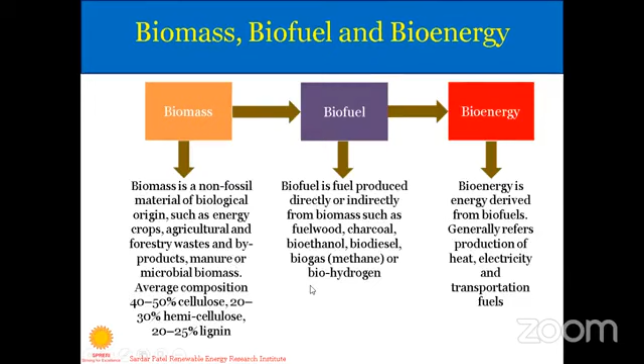What are the benefits of biomass? Biomass has several benefits: it is versatile, it has value for waste, it is abundant, and it has economical impact. According to the survey, around 500 million metric tons per year of biomass is generated in India, which has potential of 18,000 megawatt power generation.

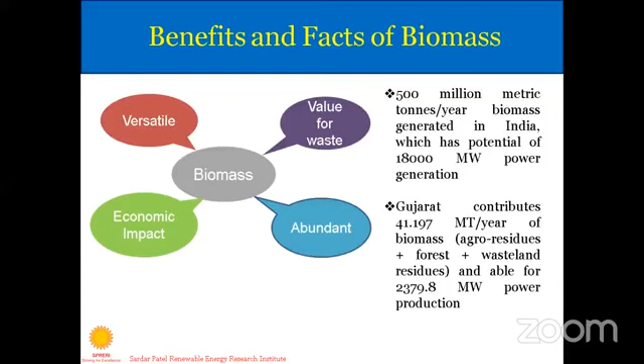If we talk about Gujarat, Gujarat contributes around 41.197 metric ton per year of biomass, which includes agro residues, forest residues, and wasteland residues, able for production of 2,379.8 power production. So there is biomass conversion technology.

There are basically two main types of biomass conversion technology: thermochemical conversion technology and biochemical technology. Bioconversion technology is basically fermentation and anaerobic digestion. I'll be talking about thermochemical conversion technology.

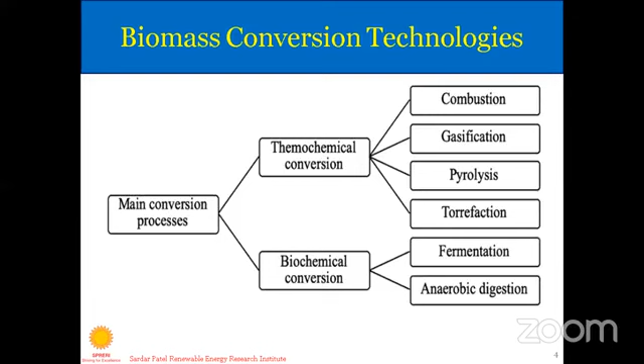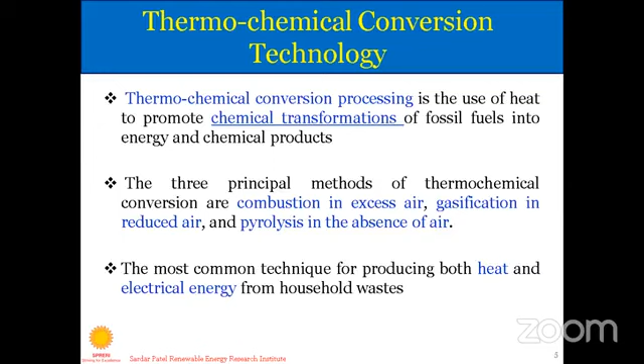What is thermochemical technology? Thermo means heat and chemical means chemical transformation. So by applying heat, we transform the chemical present in fossil fuels or biomass into energy and chemical product. Whenever thermochemical conversion technology exists, it's very simple: it happens in excess of air, reduced form of air, or absence of air. By all three means, the heat energy in the fossil fuel or biomass converts into useful chemical.

Types of thermochemical conversion technology: there are basically four types - combustion, pyrolysis, torrefaction, and gasification. Combustion happens above 500 degrees Celsius, and the primary product of combustion is heat. Pyrolysis happens in the range of 350 to 800 degrees Celsius, and the major products of pyrolysis are char and bio oil.

Torrefaction happens in the temperature range of 200 to 300 degrees Celsius, and the primary product is stabilized biomass, which is rich in carbon. Gasification happens in the temperature range of 700 to 1500 degrees Celsius, and the primary product is syngas or producer gas.

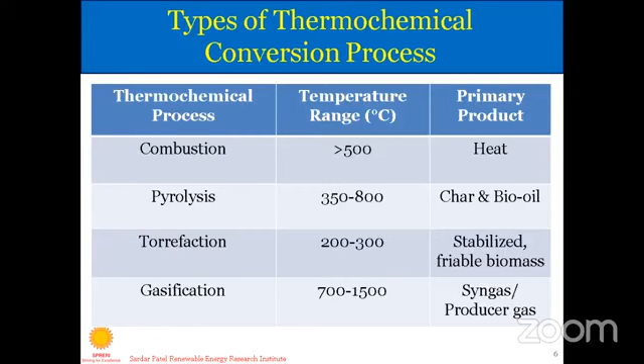Okay, so one by one I'll explain about all the technology. Combustion is a chemical process where any kind of fuel, fossil fuel or biomass, reacts with air to produce heat energy. So here are the types of combustion.

Basically, the main types of combustion are complete and incomplete, but there are subdivisions also. In complete combustion, the major product is CO2, and in incomplete combustion, the major product is carbon monoxide, where a partial oxidation reaction happens giving carbon monoxide. Rapid combustion examples are natural gas, LPG, petrol. Spontaneous combustion comes under phosphorus and sulfur. Explosion examples are firecrackers and bombs.

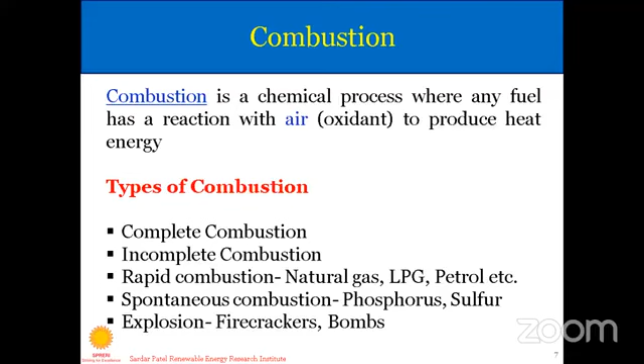Previously I was talking about the technology transfer division. Here, what we do is design and develop reactors. We do R&D on bench scale, batch scale, pilot scale, and then we transfer the technology to the field.

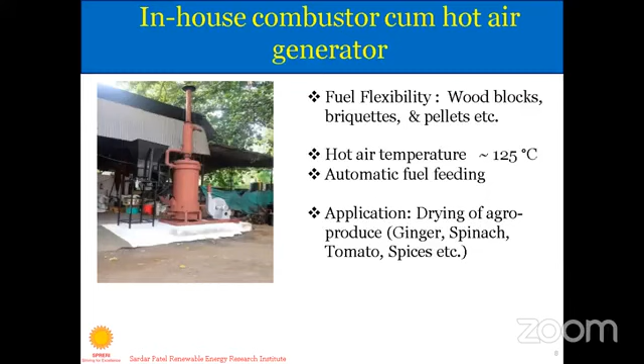So here we have an in-house combustor, which is fuel flexible, meaning we can use any kind of fuel - wood blocks, briquettes, pellets. The hot air temperature is around 125 degrees Celsius, and it has automatic fuel feeding. The application of this combustor is for drying agro produce, such as ginger, spinach, tomato, spices, etc.

Pyrolysis is the thermal decomposition of material in an inert atmosphere. The word is like pyro means fire and lysis means separating. So by heat, there is a decomposition of the material, by which the chemical composition changes. The products from pyrolysis are biochar, oil, and gaseous product, known as pyrogas, because this gas is produced from the pyrolysis process. That's why we call it pyro.

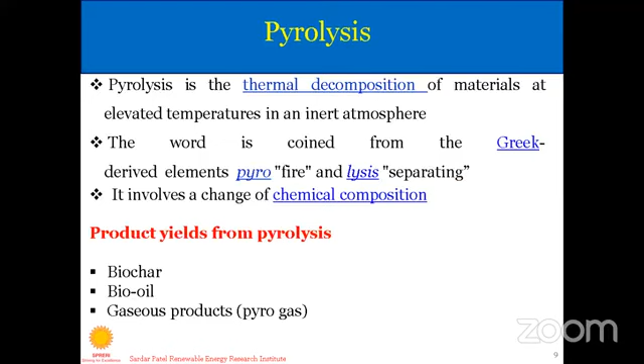Okay, this is the pyrolysis process.

Hello, hello, hello. Am I audible? Yes, yes, okay, yes, you are audible, correct.

So what happens in the pyrolysis process? The biomass first goes for drying and moisture removal. Then we grind it to the desired size, and then we inject it into the pyrolysis reactor with the help of a screw conveyor. After that, the reaction happens.

In the bottom side of the reactor, there is a heater for applying heat, which is needed for the pyrolysis process. It goes to the cyclone separator, from where we remove the char. There are two cyclone separators for high efficiency, and then the condensable and non-condensable gases separate - the condensable gases go to the condenser, and the bio-oil which we extract from here, and the pyrogas which is released to the atmosphere, or we can reutilize it for recovery of heat.

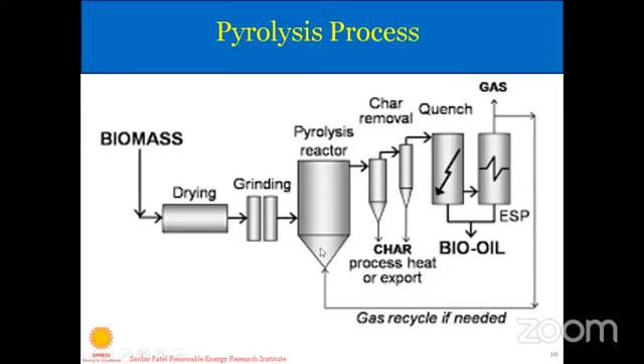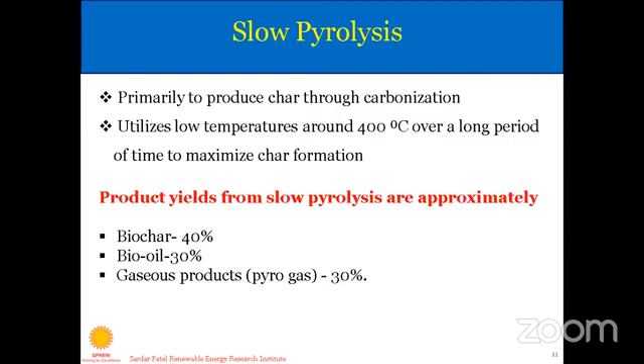So the type of pyrolysis depends upon the product which you want. There are two major types: slow pyrolysis and fast pyrolysis. In slow pyrolysis, the temperature range is around 400 degrees Celsius, and the product yield is around biochar 40%, bio-oil around 30%, and gaseous product around 30%.

So here we have two reactors for slow pyrolysis. This is the in-house batch scale pyrolysis system, with a capacity of 1 kg. The salient features, shown on the right side: it's suitable for any agricultural or industrial biomass, the feed size is 2 to 5 mm, and it's fuel flexible - we can use chopped feedstock, powder, or loose form. Temperature is around 100 to 650 degrees Celsius, heating rate is 10 degrees Celsius per minute, and the condenser type is water cooled double pipe.

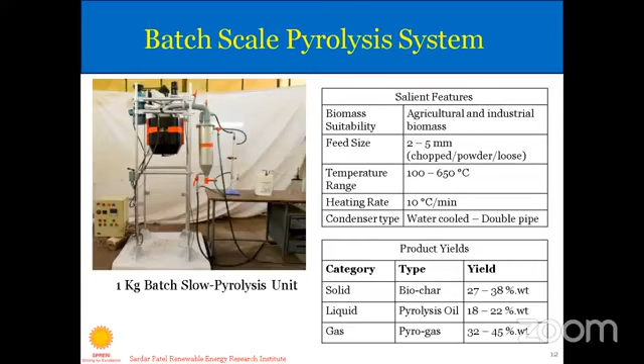The product yield is mentioned here: biochar is around 27 to 38 weight%, pyrolysis oil is around 18 to 22 weight%, and pyrogas is around 32 to 45 weight%. This is another continuous pyrolysis system which has a capacity of 18 to 20 kg per hour, with a heating rate of around 10 to 25 degrees Celsius per minute.

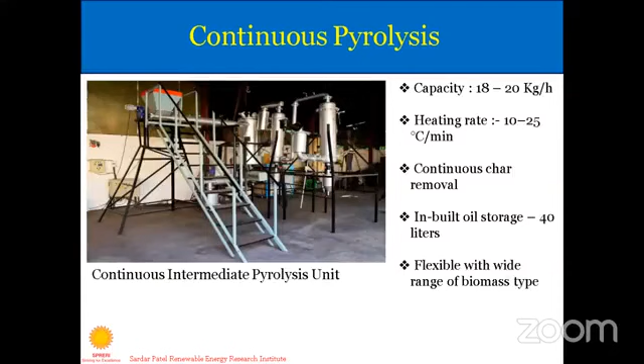This is a continuous reactor. The inbuilt oil storage is around 40 liters, which is flexible with a wide range of biomass types.

So, slow pyrolysis is basically used for the production of biochar. So what do we do with that biochar?

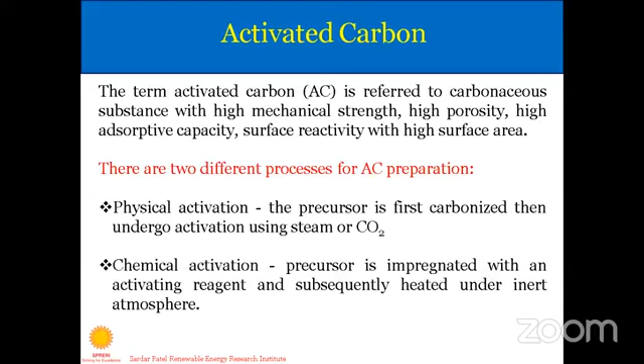We convert that biochar into activated carbon. There are two basic processes for converting biochar into activated carbon: physical activation and chemical activation. In physical activation, the precursor is first carbonized, then undergoes activation using steam or CO2. In chemical activation, the biochar or precursor is impregnated with an activating reagent, any chemical reagent. The most popular chemical reagents are H3PO4, KOH, and ZnCl2, and it is heated under an inert atmosphere.

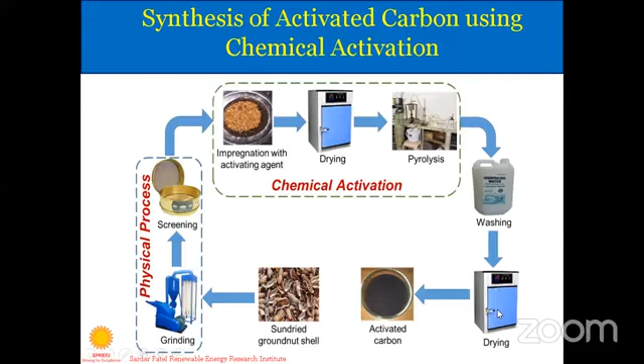This is the schematic of the entire process. We can see here the feedstock is impregnated with activating agent, then we dry it overnight. Then the pyrolysis process happens, and then we wash the activated carbon. And then again we dry it. This is the final activated carbon.

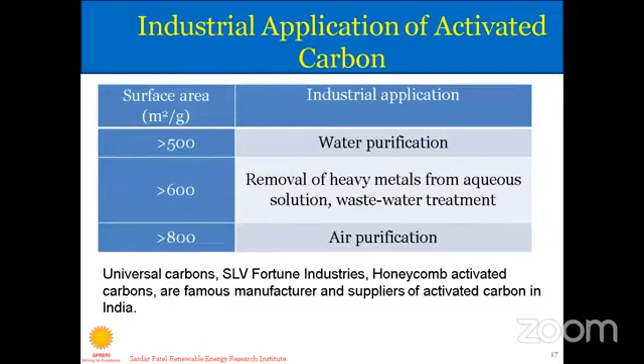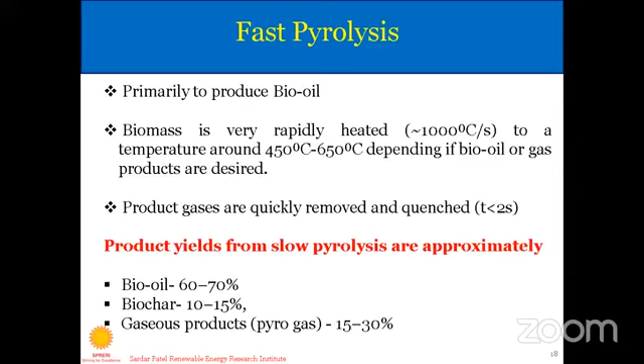The second form of pyrolysis is fast pyrolysis. This technique is basically used for the production of bio oil. Here the bio oil yield is around 60 to 70 weight percent, biochar is 10 to 15 percent, and the pyrogas is in the range of 15 to 30 weight percent.

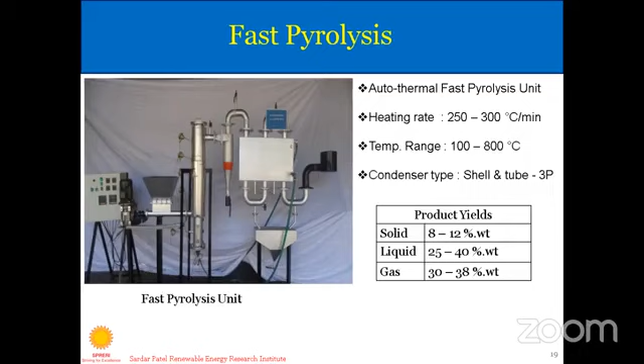This is the in-house fast pyrolysis reactor, which has a capacity of 10 kg per hour. This is a continuous reactor. Here the heating rate is 250 to 300 degrees Celsius per minute, and the temperature range is around 100 to 800 degrees Celsius. This is basically for bio oil production.

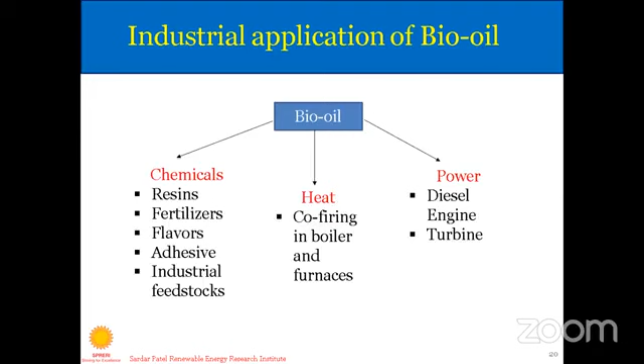So the third one is torrefaction. Torrefaction is nothing but mild pyrolysis, which has been explored for the pre-treatment of biomass to increase the heating value and hydrophobicity. This happens in the range of 200 to 300 degrees Celsius. Coffee beans are the best example of torrefaction. The typical mass and energy yield of torrefaction is around 70 to 80% and 80 to 90% respectively.

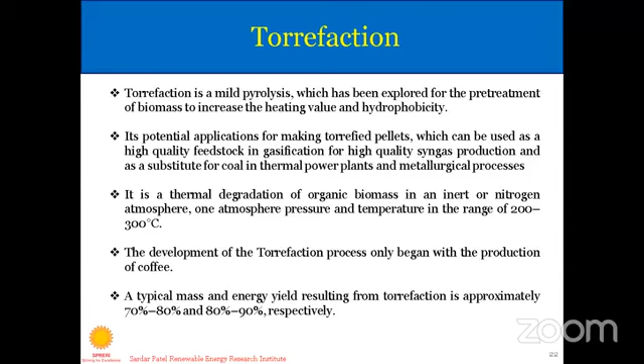The fourth thermochemical conversion technology is gasification. Gasification is a process which converts the organic matter present in fossil fuels into carbon monoxide, hydrogen, and carbon dioxide. Gasification conditions are like the temperature range is 800 to 1500 degrees Celsius.

The product basically depends upon what kind of gasification medium you are using. If you are using steam as a gasification medium, then you will get a higher amount of hydrogen. If you use CO2 as a gasifying medium, you will get a higher amount of carbon monoxide due to the Boudouard reaction. If you use air as a gasification medium, then the maximum amount of nitrogen will be in the product gases.

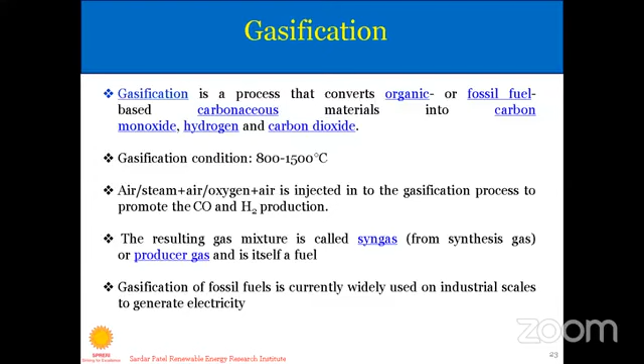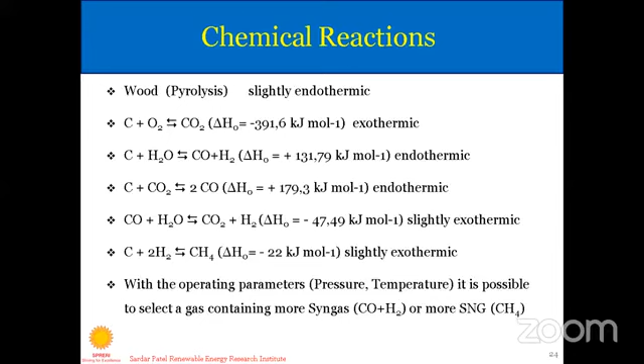These are the chemical reactions which happen during the gasification process. First, carbon will react with oxygen and give carbon dioxide. The char will react with steam and give a combination of carbon monoxide and hydrogen. There is a Boudouard reaction in which carbon reacts with CO2 and gives carbon monoxide. Again, carbon monoxide will react with steam and give CO2 and H2. So these are the basic reactions during gasification.

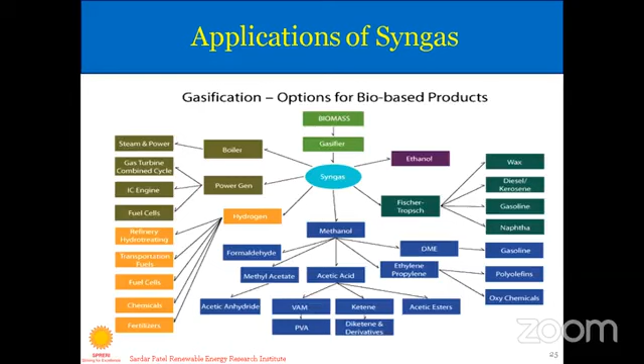We can use it for the production of methanol, or we can directly use it for the Fischer-Tropsch synthesis process. Okay, these are the classifications of gasifiers.

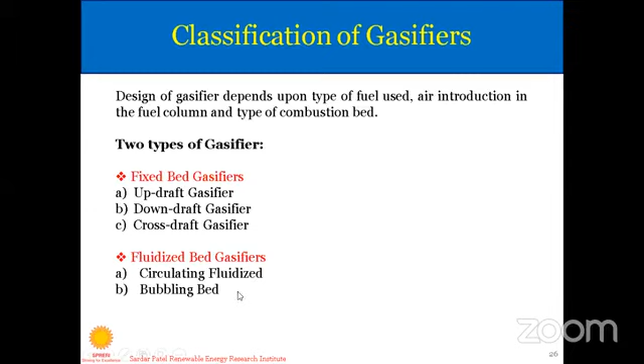Basically, the gasifier is of two types: fixed bed gasifier and fluidized bed gasifier. The fixed bed gasifier has three categories: updraft gasifier, downdraft gasifier, and cross-draft gasifier. The fluidized bed gasifier has two categories: circulating fluidized bed gasifier and bubbling fluidized bed gasifier.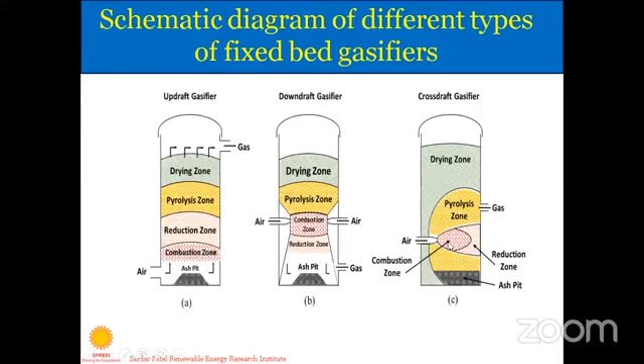Same with the downdraft gasifier: here the produced gases exit from the down portion of the gasifier, that's why it is known as downdraft gasifier. In a cross-draft gasifier, the arrangement is a little similar to downdraft gasifier, but here the gases exit from the parallel side of the air injection portion.

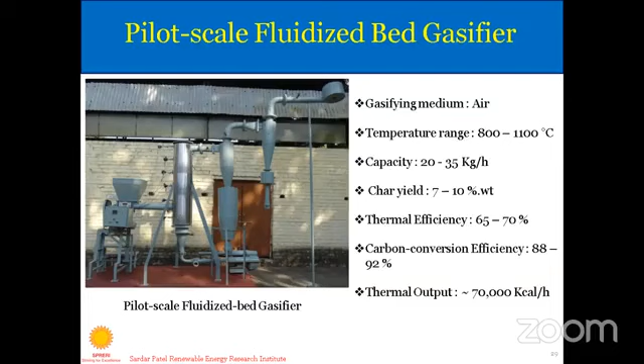This is the schematic of a fluidized bed gasifier. We have in-house a pilot scale fluidized bed gasifier with a capacity of around 20 to 35 kg per hour. In this arrangement, we use air as the gasifying medium, and the temperature range is 800 to 1100 degrees Celsius. The thermal efficiency of this gasifier is 65 to 70%, and carbon conversion efficiency is 88 to 92%. It has a thermal output around 70,000 kilocalories per hour.

We also have another industrial scale fluidized bed gasifier, with a capacity of around 80 to 100 kg per hour, and a temperature range around 800 to 1100 degrees Celsius. In this also, we use air as the gasifying medium, and the thermal output is 2 lakh kilocalories per hour.

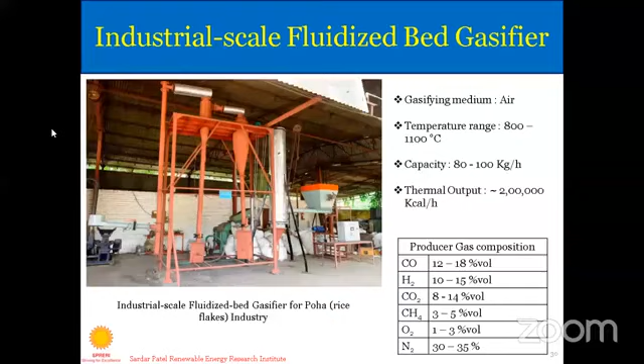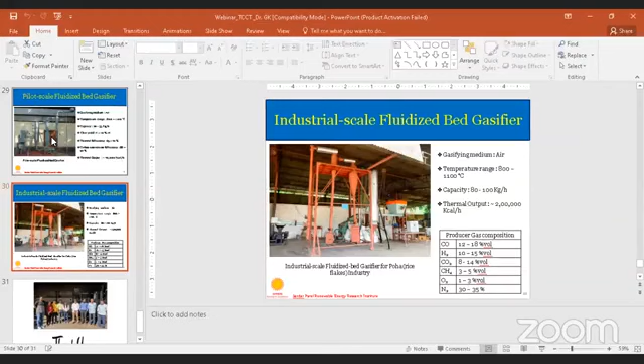Such an informative session we have just finished, and we gained knowledge about the different types of gasifiers and the behavior of the thermochemical conversion procedure also. Students, if you have any kind of queries, you are free to ask madam related to the thermochemical conversion.

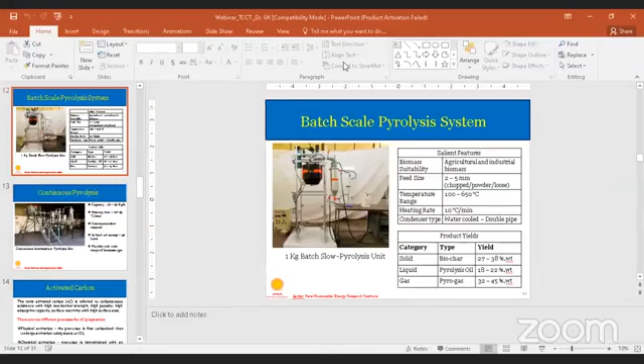Hello. Hello, yes ma'am, can you leave the meeting, disconnect that? Yes, yeah, you can disconnect it.